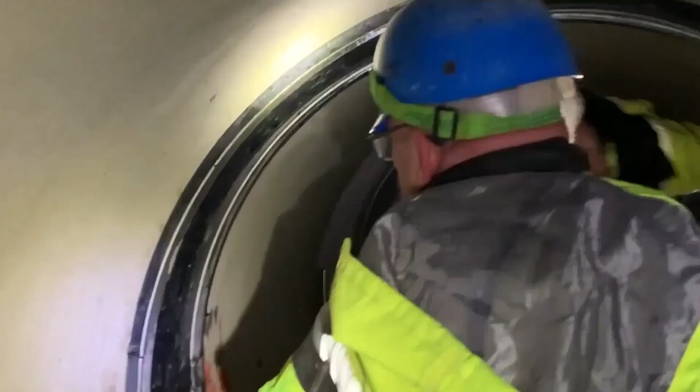Let me just kind of jump into it.

So the basic function is it's a point repair system for pipes to eliminate leaks from the inside. So sometimes they'll do dig and replace, and they'll do liners or grout. This is our solution. It's a targeted repair generally used on joints, but other compromised points as well.

So it's comprised of an EPDM rubber sleeve and stainless steel retaining bands, and those retaining bands hold the rubber in place over the repair area. So both the rubber and the steel are manufactured in-house by us, so they specifically fit the pipe when they go out. So that's what that looks like when it finally goes out, and then just put it in a pipe.

The point of the joint prep is to get the interior surface of the pipe to be fairly clean and smooth, at least where the ribs of the rubber seal will be laying, so that those ribs can be in constant contact with the interior surface of the pipe all the way around. So step one would be joint prep, where we're cleaning out the mineral buildup and debris, that kind of deal. So in this instance, he's scraping away calcium. A lot of DOT applications, it's just mud and loose debris like that.

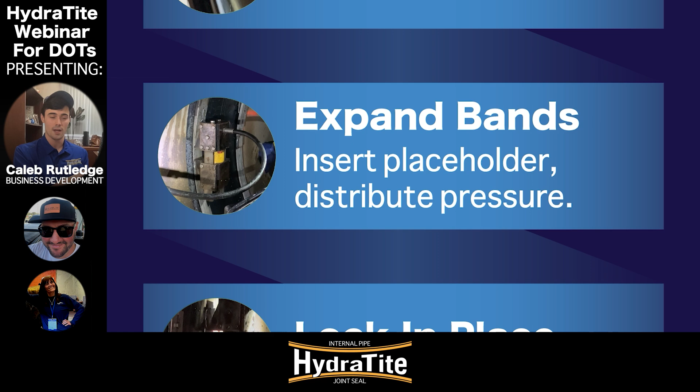And then once you're done that, you're going to go to the other expansion point in that same band. So you have 2 expansion points on either side. The first one gets a placeholder wedge. The second one you're going to actually bring up to pressure. And when I mean up to pressure, that is determined by the diameter of the pipe, the material of the pipe, and that's going to be something you're told prior to getting onto the site, so you'll know what that is. But we're going to just say it's 3,000. You're going to get up to 3,000 pressure on that expansion point, the final expansion point in that band.

Once you get it to 3,000, you're going to go ahead and tap around the interior of the band to disperse that pressure. It's called seating the bands. So the first expansion point is a placeholder wedge, and the second one you bring it up to that 3,000, let's say, and then you're going to go ahead and tap that retaining band as he's doing here. And the other person will be watching the pressure. If it dips, you'll point out, hey, it dipped when you tapped here. You're going to tap around that spot until the pressure then stabilizes. Once the pressure is stabilized and you're able to tap around the entirety of that band and the pressure doesn't drop anymore, you know there's no more shifting and you're good to go.

And then your next step is, of course, you're going to lock that wedge in place underneath the retaining band. So as you can see there, once you've got it up to pressure, once the pressure is stabilized, you lock in a wedge under the retaining band. Once that wedge is in place, it takes the pressure off the expander head and you can pull the hydraulic expander out of place.

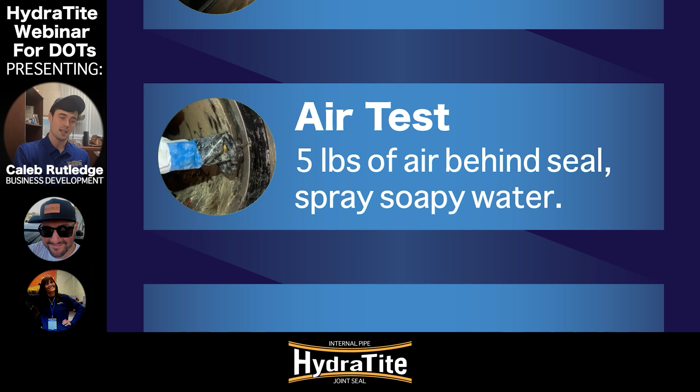The final step, which you will not necessarily have to do in every application, is an air test. These are generally going to be used in potable applications, but sometimes the owner of the project will request that they're in there. So basically the seals go out with an air test valve built in. And if you have to air test your seals, the first thing you're going to do is open it up with a little Allen wrench. Then you're going to attach a tube to it and pump 5 pounds of pressure behind that rubber.

Once the pressure has been established as 5 pounds, you're going to maintain pressure because you might lose a little bit here and there, and then you're going to spray around the outer edge with a soapy solution. So maintaining that 5 pounds of pressure, spraying with the soapy solution, and then inspecting for bubbles. Basically, you're looking for escaping air, anywhere that there might not be a perfect seal, kind of like checking a tire for a flat. So once you find a few bubbles, you're going to tap and try to redistribute pressure a little bit, especially in that location. And once the bubbles have all been taken care of, and you keep the pressure at 5 pounds and you keep spraying and you're not getting any more bubbles, you know you got a good seal. So you can go ahead and close up the Allen wrench lock there.

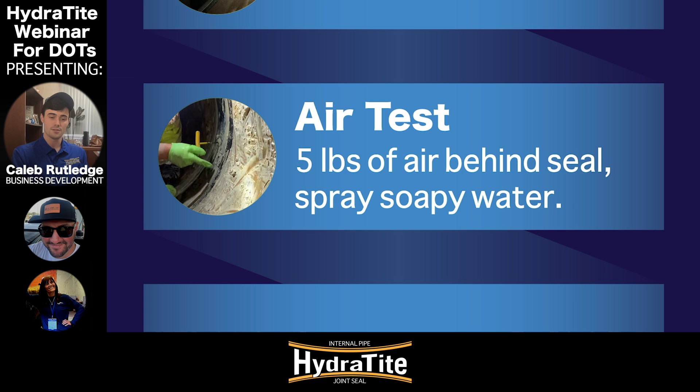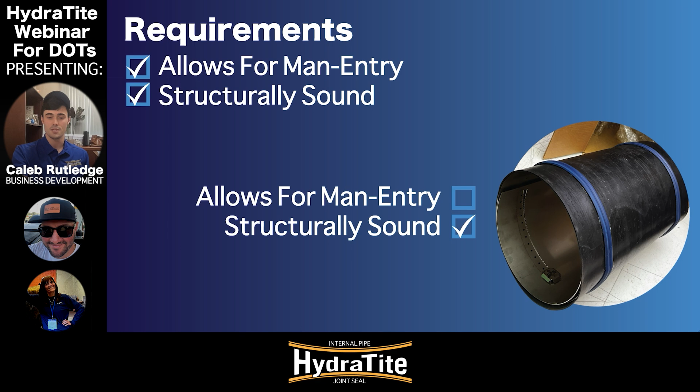And then it's just that easy. You've eliminated your leak and your pipe has been rehabbed. So the general requirements for our seals is that the pipe is man entry size. So that generally means 24 inches and larger in diameter, and the pipe has to be structurally sound. This is not going to save a pipe that's ready to collapse. And in circumstances that your pipe is too small for man entry, we do have other options, but that is a different topic for a different day.

Okay, so we're talking about the customizability and flexibility of the seal. A couple of things to note. The general seal, the standard size, the standard width, has a coverage area of 5.75 inches. In circumstances where the pipe has greater separation or more of an offset, you might need to use our extra wide or double wide. The double wide having a clearance or a coverage area of 16 inches.

And then the image on the right of the screen there is a seal with a whole bunch of retaining bands, and that's generally going to be in a lot of power applications or applications with a lot of high head pressure. DOT and stormwater culverts, they generally just need 2 bands, with the exception of the double wide, where we generally recommend 3 bands. But that massive, 7 bands, that's not something you guys are generally going to have to deal with. Just want to let you guys know that's another thing that can be done.

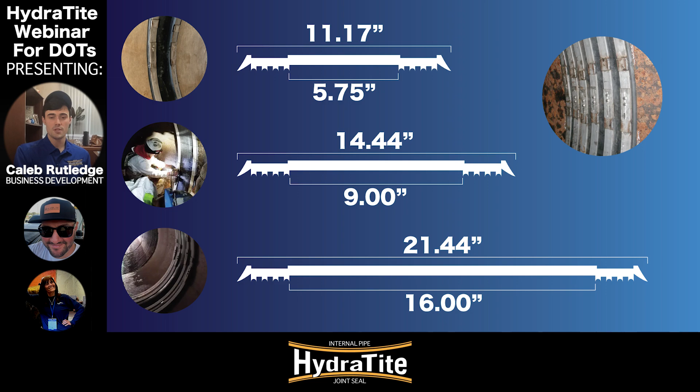Okay, so our most basic installations, the ones that we do most frequently, is circular pipe repair. So a lot of stormwater culverts is our bread and butter, really. And so that's what this would look like here. You go in, hopefully the joints aren't too bad, you put in the stuff.

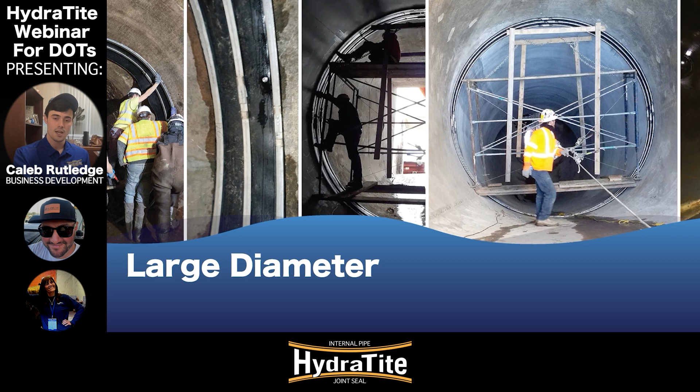And then we do some large diameter, which the process is more or less the same, but you might need scaffolding to reach all the expansion points, because as the seals get bigger, we generally break those retaining bands into more and more pieces for easier shipping, easier movement, all of that kind of deal. So you might have more expansion points within one of those seals. The installation process stays almost the same. The first set of expansion points all get placeholders, and the last one is where you go ahead and you actually bring it up to pressure, whatever it is for your application. But the process is fairly similar, fairly straightforward.

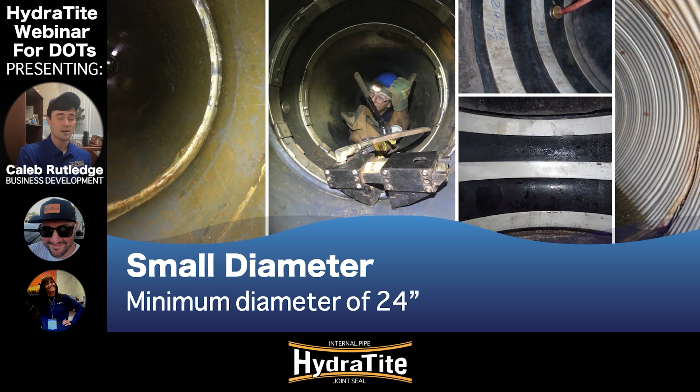We do some small diameter stuff too. The smallest we can do, generally speaking, is 24 inches. That's when we can get people in there and actually install these pretty easily. Anything smaller than that, it might not work. There are circumstances if the repair area is towards the end of the pipe where we can kind of just reach in. We don't have to get our whole body in. That might be an instance where we can go a little bit smaller. Generally, it's 24 inches though.

And this has to be shipped with additional materials, but we can do corrugated. Basically, we have to kind of fill in the indentations of the corrugation either with concrete or butyl rubber to achieve a proper sealing surface. So it takes a little extra time, a little extra materials, but you can do corrugated as well.

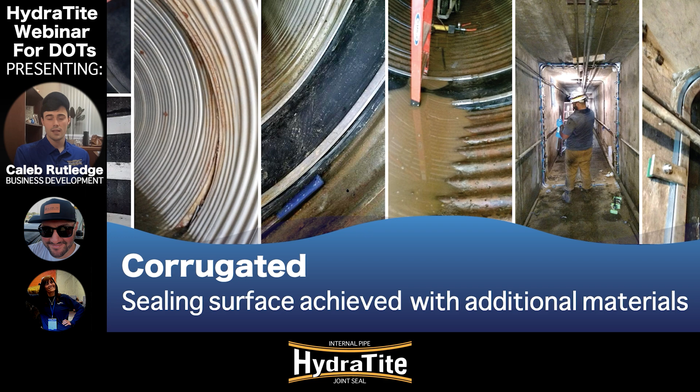And the same kind of applies for our irregular shape installations, which are the box culverts, the elliptical, the D shapes, and many others. These can be done, they take a little extra time and a little extra materials. So the extra materials generally being anchors and hold downs that run along the outside of the retaining bands, as you can see in the pictures on the left, and that D-shaped one that he's standing in, you can see along the bottom at the invert of the pipe there. Those are kind of the anchors and the hold downs, which apply additional pressure to the retaining bands. So that's something that's necessary for irregular shapes.

Also with very sharp corners, as you can see there, you might need a transition over that corner, like a corner form, which we can manufacture for you as well. Again, possible, just takes a little extra time, a little extra material.

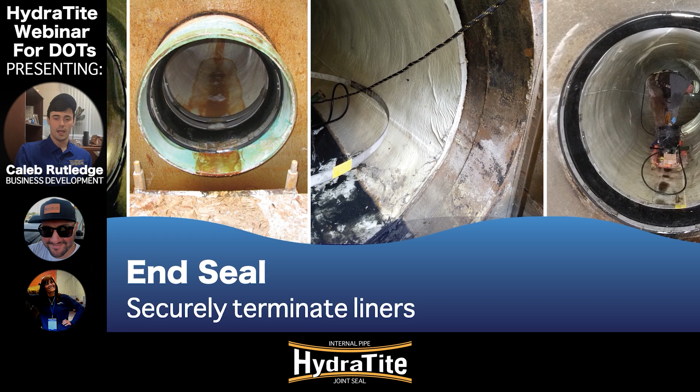And then end seals. So it's not always this or that situation with liners. We have installed these at the end of a liner before. So when I've gone on job sites, I have seen the occasion where the liner looks like it's fairly intact, but the end, the lip has kind of come up a little bit, and the integrity of the entire liner was then compromised because water backtracked, kind of lifting it throughout.

So our solution to that is just an extra layer of protection at the end, which we have suggested on several projects where you would just go in and install this over the end. And these have also been some of the instances where we have done pipe that's smaller than 24 inches, because you're looking at the end of the liner, sometimes the end of the pipe. As you can see on the left there, you can just kind of reach into the pipe and install it. So I think that one might have been 18 inches, so that's a good example of one of the smaller ones. But basically, it's just an extra layer to protect a previous repair like that.

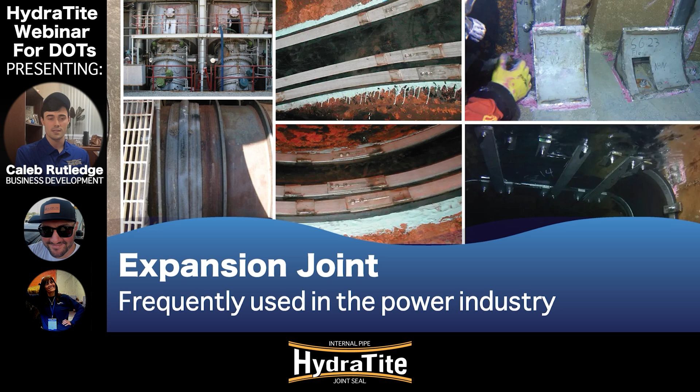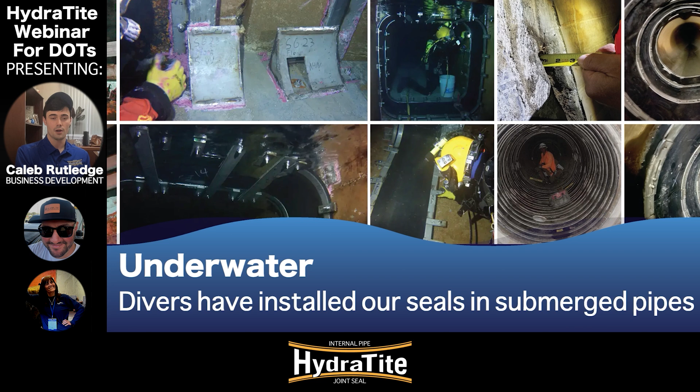And mostly the power plant, so I won't go into this too much, but expansion joints can also be replaced with HydraTite, and so that is what that would look like. These have been installed underwater as well, so these are some divers from contractors we know. We have people we can get you in contact with who can help you do that, and our seals do work sometimes underwater.

And earlier we mentioned that there are 3 widths to the seal. So you have your standard, your extra, and your double, the double being the most coverage you can get with a single seal. But imagining that the damaged portion is more extensive than the double wide can cover, we are able to interlock these in a sleeve-like situation. So you interlock them so that you have one seal facing down, one facing up, and then one facing down. And I'll show you what that looks like, kind of like that, okay? So they can cover more area.

You can do that as long as you want. The longer you do it, the farther you go with it, it becomes less economic, and you might think about other repairs. But interlocking 3 of them or 9 of them might make more sense economically, depending on your circumstance. So we've done that a few times.

All right, so why HydraTite? So other repairs: dig and replace is not necessarily most efficient with time. It's more disruptive to traffic. Lining is less of a targeted repair. It might make sense in certain applications, but a lot of the time it's the joint or a point that's causing an issue in your pipe, causing infiltration. So if you can go ahead and target that, you're going to save time and money.

When it comes to grout, a lot of the time I see it falling out pretty fast, and I'm looking at 5 to 10 years with grout, whereas if everything is going right and the application is pretty normal and the installation's good, our seals are going to last you around 50 years. So you're looking at replacing the grout maybe every 5, and with us you're just one and done. It's the next person's problem when you put in our seals. So that is kind of why us against other repairs.

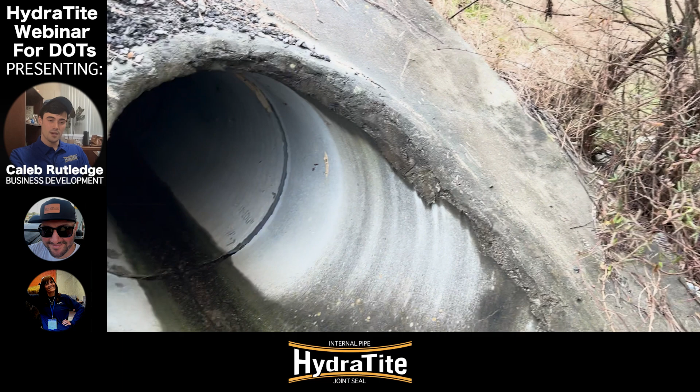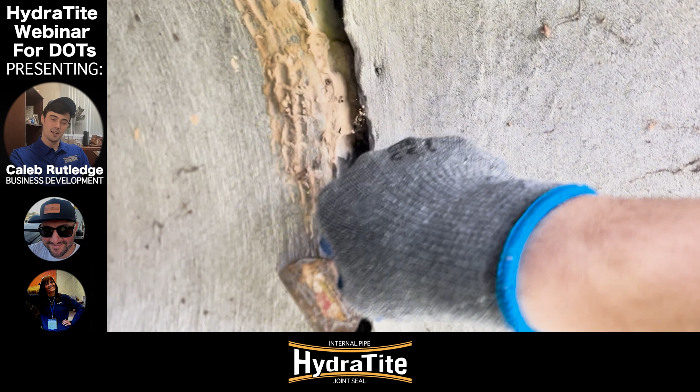And then final example here, this was Alabama's DOT, where I actually was the installer for that when we were getting on their QPL. And as you can see, there were some mud daubers that had built their nest in there. Had to pull those away, remove anything from the interior surface that would mess up the seal.

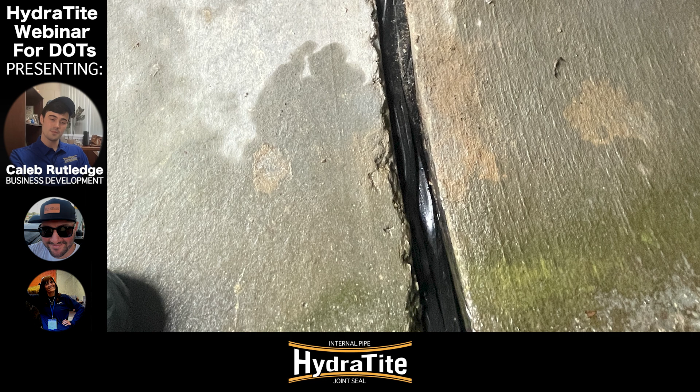And in some installations, such as this one, we were requested to put in a fill into the joint itself, and that's a little bit of rubber there. Sometimes it's concrete. It just depends on what the owner of the project wants. In this application, they requested I put in some rubber filler, just as an additional layer there.

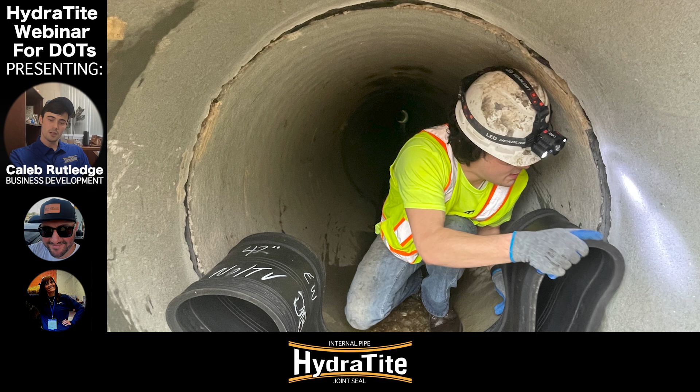Then I put the rubber in place. I worked out all the oddities, the bumps and the humps, smoothed it up against the pipe, put in the first retaining band, and then I locked that in place with one of the wedges. That's what that looks like halfway through. And then I went in and locked the second retaining band in place. And this whole installation took me about 45 minutes.

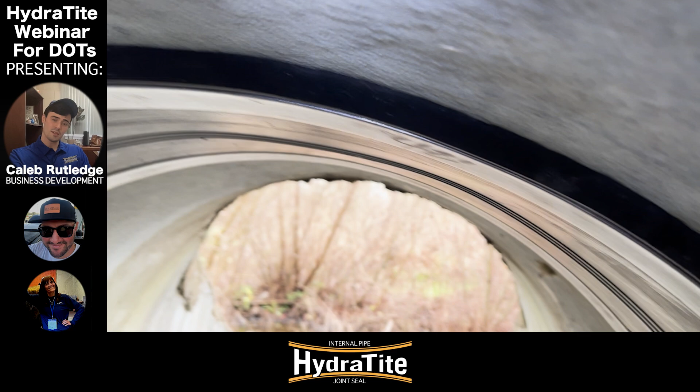And with simple installations like this, if you get used to the installing process, you'll be able to do it even faster. Our field crew can do it a lot faster than I can. I'm an office guy, but that also speaks to it. If I'm just the office guy and I can do it in 45, it's pretty simple technology. So yeah, that is pretty much everything I have.

Jennifer, do you have anything I left out? No, you covered everything pretty well. Awesome. Do you guys have any questions or anything I should go more deeply into?

So, generally speaking, is this a product you guys install? Or is it something you would install the first one and then give us a tutorial on how to install it ourselves? So it kind of just depends. We can do trainings. Our reps in your area would be VEWS, who I believe are in this meeting as well. So they would be the installers over there. When it comes to purchasing everything, we run it through them. But the general packages we can do are trainings or full installations or whatever you need.

Hey, Caleb, I can add to that. This is Don LeBlanc from VEWS. Good morning, everyone. So yeah, right to Caleb's point, we are your region representatives for HydraTite, and we are also trained on the installation. But if you guys need one or three sources for bids or whatever, or if you want to get trained, that is something we can assist with as well.

I will say the HydraTite crew, as Caleb mentioned, is obviously the most experienced. They're awesome. They're efficient. We will often quote their services as well as their products. So there's all kinds of ways we can, pardon the expression, skin the cat, but we can get it done for you, no matter how you want to do it. I assume that goes for any prep work as well that would be required? Yeah.

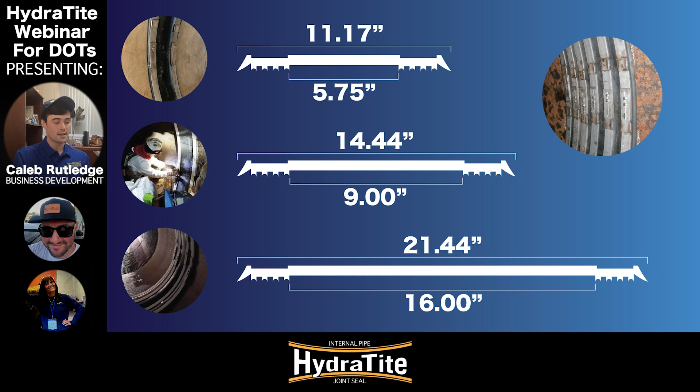I would not necessarily say extra wide would cover all the way up to 7 inches, because generally speaking, they're not perfectly flush. They're also going to have generally a little bit of offset as well, so you want to take that into account. But the maximum it could cover is 7 inches. And then the double wide has 16 inches between the ribs, but you're going to want that 1 inch of clearance and also a little bit of give for offset as well.

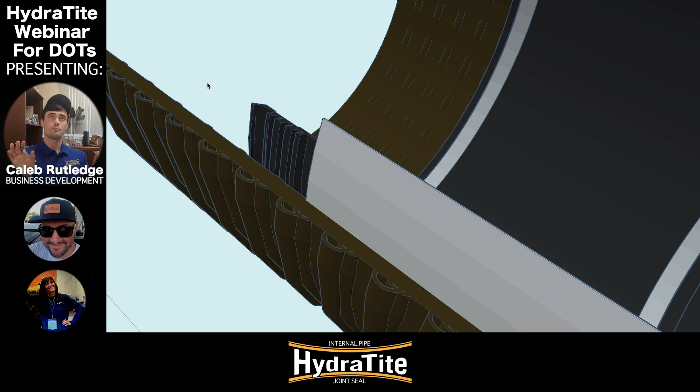And as for the backing bands, there are different situations where you would want to do that. Prior to putting down the rubber, you put this steel band, a little bit thinner than the retaining bands, against the interior surface of the pipe, and then the ribs of the rubber are placed on either side of the backing plate.

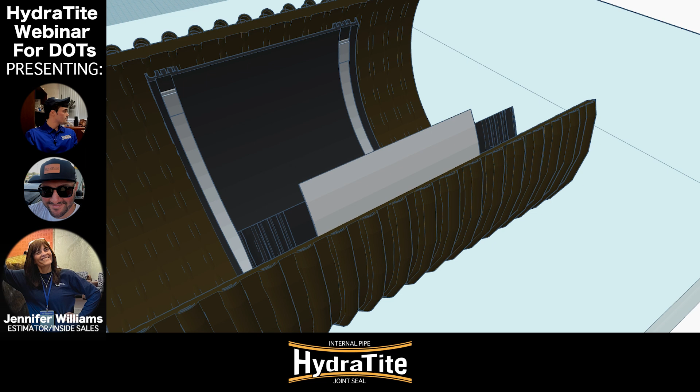And Jennifer, that would be used in what kind of circumstances? Anything with any kind of infiltration. You don't want the EPDM rubber sleeve to balloon at all. So if you've got sediment or anything coming in, you're going to want to put that backing plate on, as well as the pressure in the pipe to where it's not forcing that rubber through that

separation. Yeah, so high head pressure, or if you expect a lot of debris to fall on the rubber, it's an additional layer of protection behind. So a lot of the DOT stuff that we've done in Ohio hasn't needed that. I have been on a project where we did have to put those in before. So it depends, but head pressure and lots of debris.

Yeah, there's been instances, this is Don again, I'm up in New England, so in a lot of stormwater culverts, like Caleb was mentioning earlier, inherently what happens is the fines tend to fall out, right? So you end up with rocks or whatever the contractor used back in the day to backfill that pipe with. The larger stones are left over. So your fines are usually washed out.

And as Caleb mentioned, we want to try to span that so we have something to push up against, especially on a double wide seal, if we want to get a third or a fourth stainless steel backer band to press up against something tangible, then we're going to want to use an additional backer band for that in many instances where the gap is large.

Okay. Yeah, I saw the part of your presentation where they showed the rubber going in. I was going to ask if you had ever grouted the joint and then installed this, but it sounds like you guys have a couple of methods that go about securing the joint ahead of time if needed. Yeah, there are many instances where an owner might say, hey, can you parge that joint a bit up before you put your HydraTite seal over?